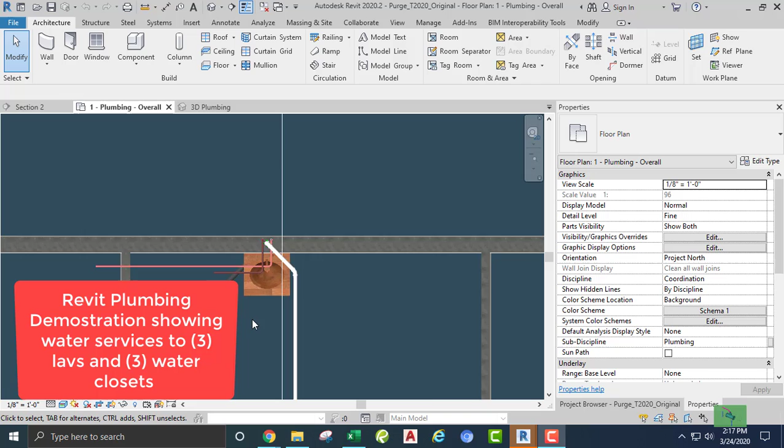Okay, let's look at some water piping, and we need to plumb this lavatory, two more lavatories. Looks like 3 water closets. Okay.

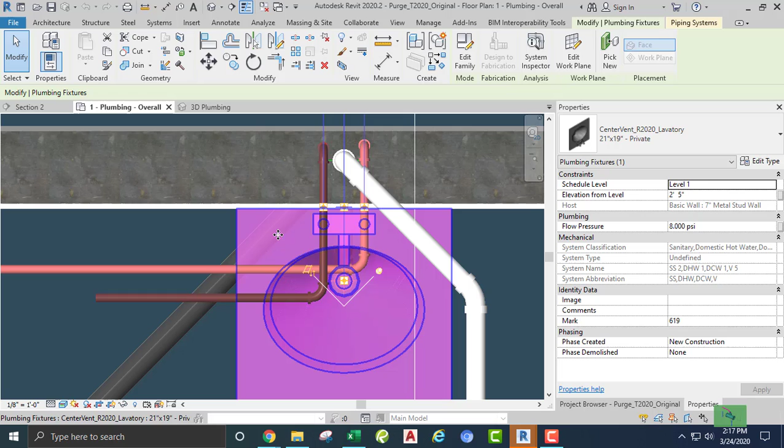Okay, let's start off with the hot water. Looks like these two are already there. Let's go back, I'm gonna start this over again. Just tab and erase this, pin objects.

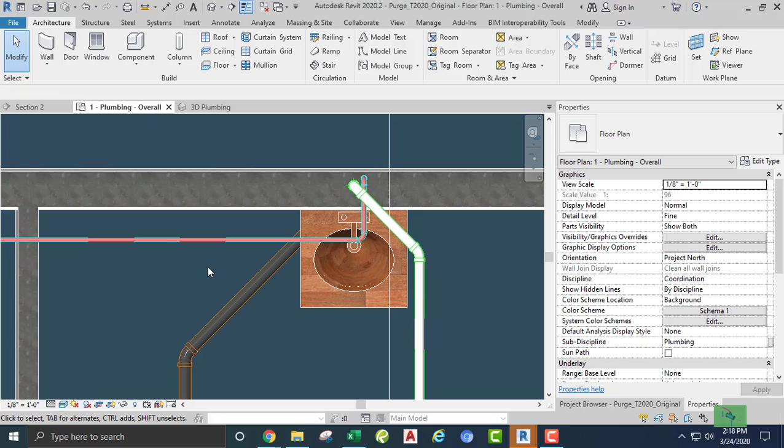Okay, I don't know why I would say that, but okay, so let's start off with this hot water. I'm gonna change this to a wireframe so we can see what we're doing.

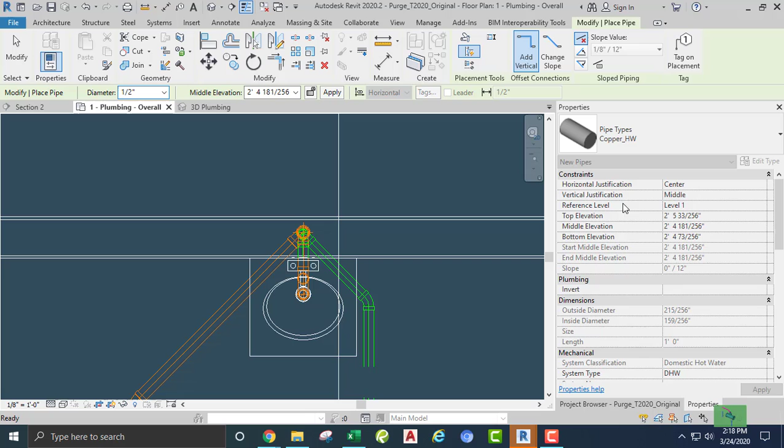So we got a 1/2 inch coming out of the rough-in. We need to change this pipe type to hot water, and we have hot water. We are gonna go up about right here, and now let's change this to a 3/4 inch and 10'8" from the floor, and we can come out.

Okay, let me check and see. Okay, so at 10'8" we can come out, and let's just take a look at that here. Okay, let's go back,

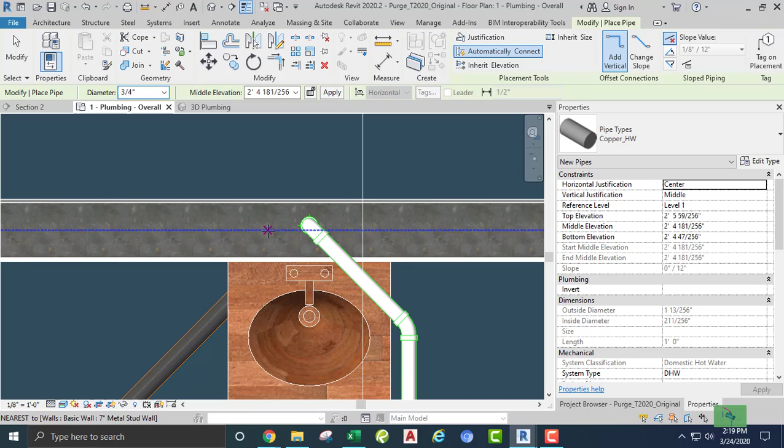Start over, and from here, that is a 1/2 inch. We're going to change that to 3/4 inch. And we're going to go up in the ceiling, 10'8", come out about right there, and go out there.

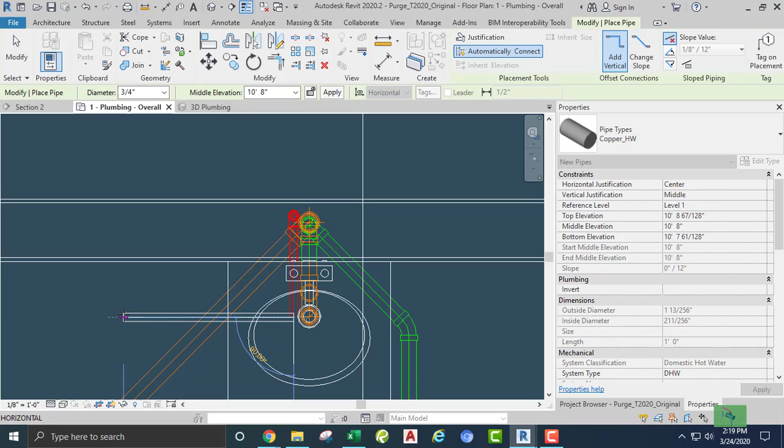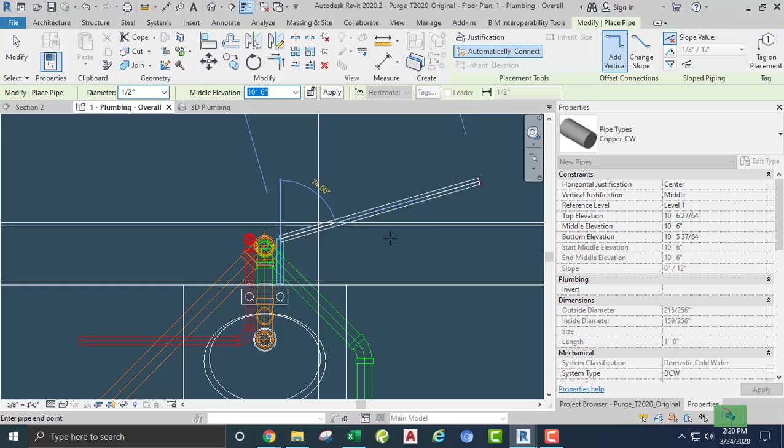Okay, and for the cold water, we're going to do the same thing, only we're going to go up in the ceiling 10'6", 1/2, and for the cold water, we're going to come up to about right there and change it to 10'6". Okay, and maybe about right there, and go out that way, just so we can see what's going on.

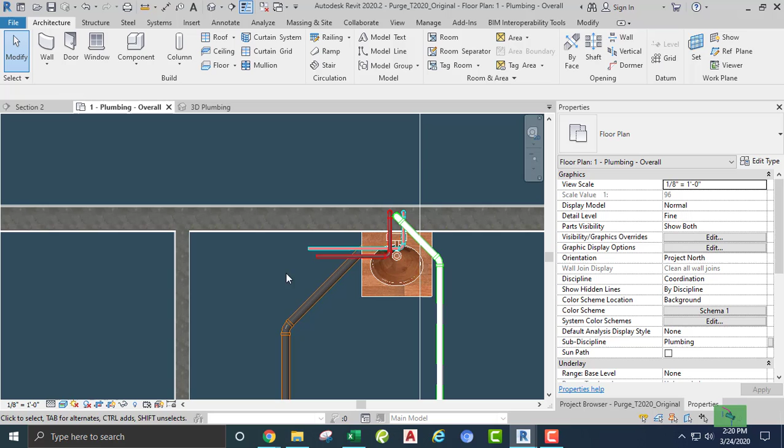Okay, so now, because the water heater is here, let's draw our pipe. That's a 3/4 inch. Yep. Okay, here and down here.

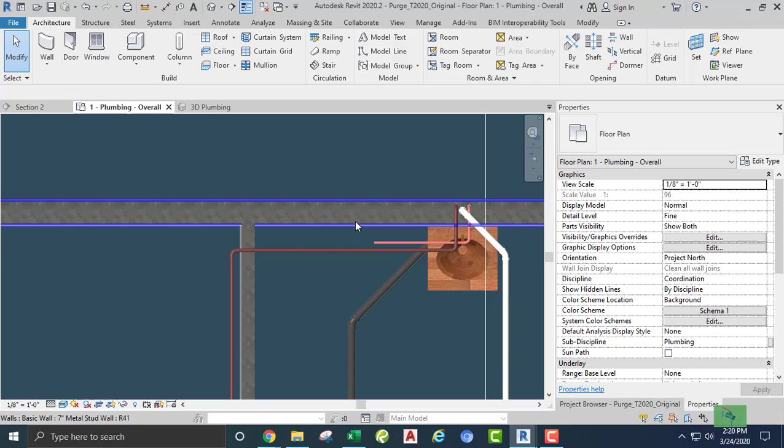Okay, and our cold water is going to go about right there. It's going to be cold water coming in the street from here, and I think it's a 2 inch based on what I see.

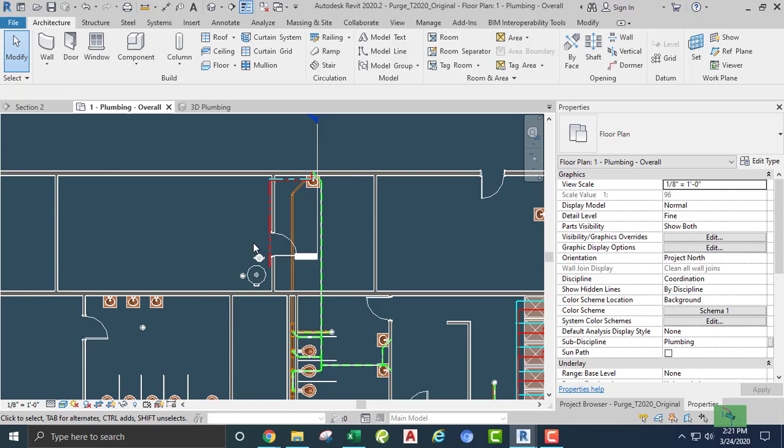So we're going to go to systems, and the pipe is going to be a 2 inch cold water. Okay, I'm in the ceiling at 10'6".

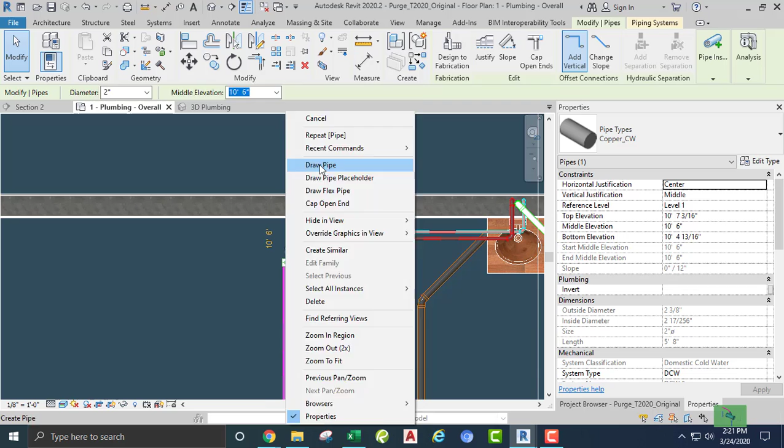Okay, so we can go from here, go out the building. We're in the ceiling space. Come out the building here and go down to the floor, or ground in this case. So let's say it's a negative 9.

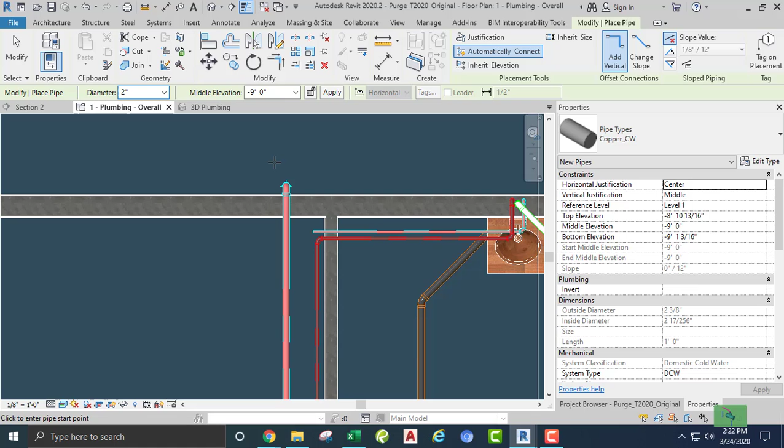Okay, and we can look at our 3D pipe. You know, let's look at a section through here, just so we can. Section 2. Okay, so we can trim that back.

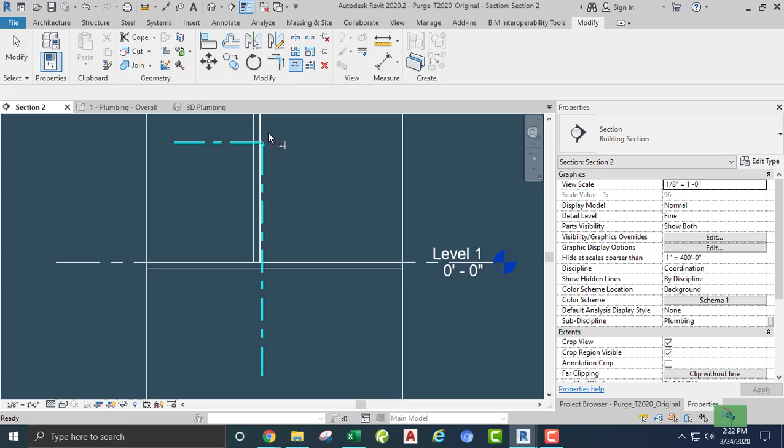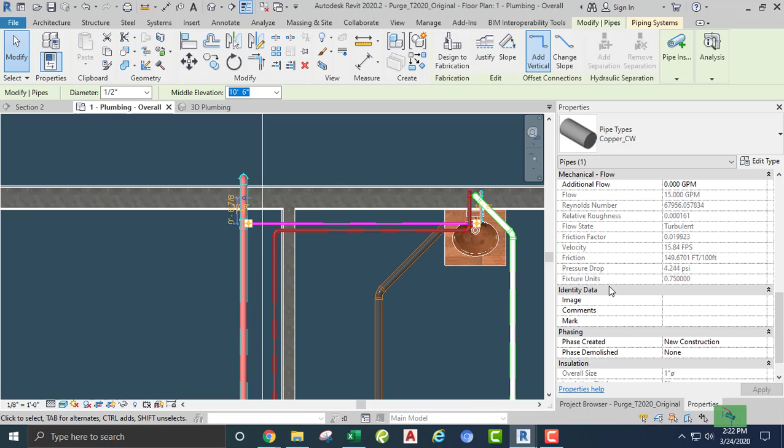Okay, that looks good. Let's go back to our floor plan, and we're going to connect. Let's connect the cold water into, okay, make sure we got our units, our fixture units are counting. Okay, fixture units, we're counting fixture units 0.75.

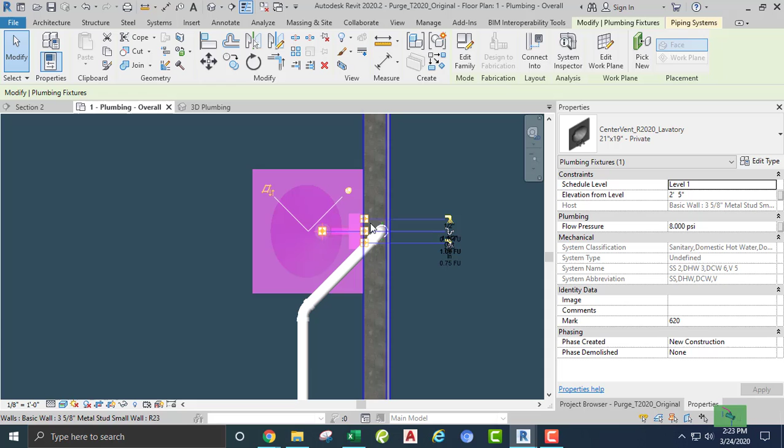Okay, so as we go down, let's go down and get the two lavatories. And for the hot water, we do the same thing. 1/2 inch, we go clockwise, make sure everything is good. That's hot water. Okay, we come out about right, let's say right there, and

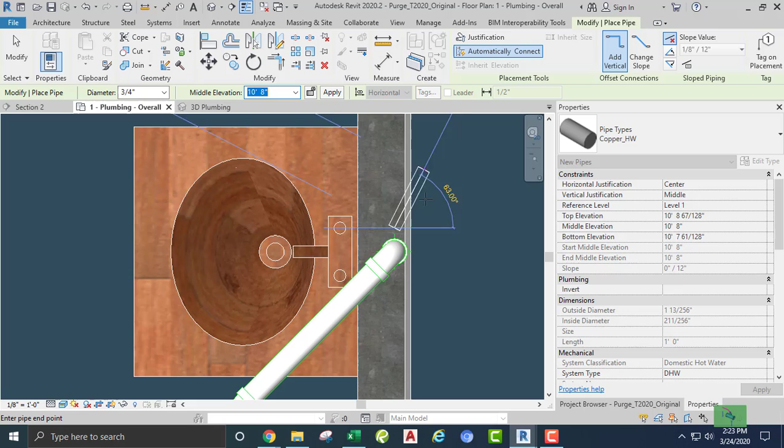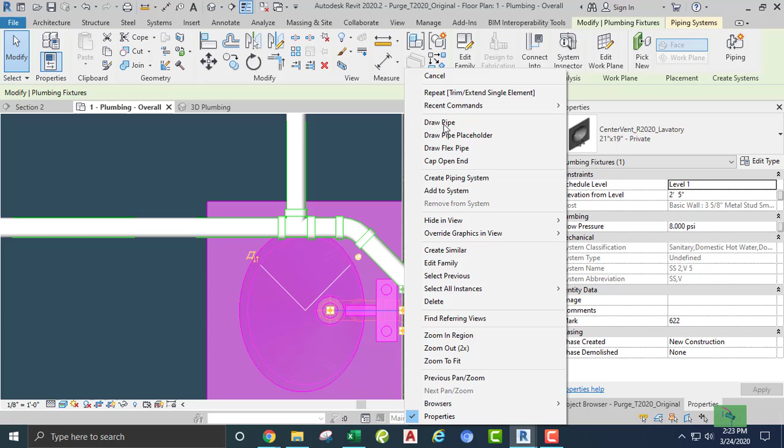Change. We come up at 10'8". Okay, say about right there. And what we're gonna need to do is connect into the hot water. Okay, let's get this other hot water from the other lavatory.

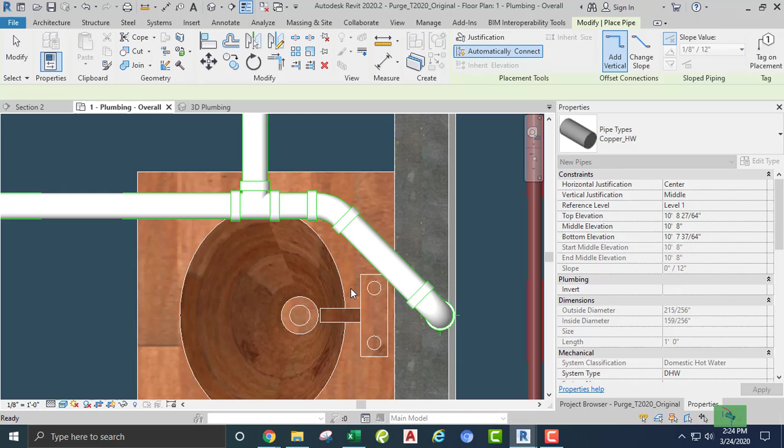Okay, 1/2, and hot water. Come out to about right there, and come up 10'8". So that's 1/2. I'm gonna need to change that so we can see what's going on. This is gonna be a wireframe.

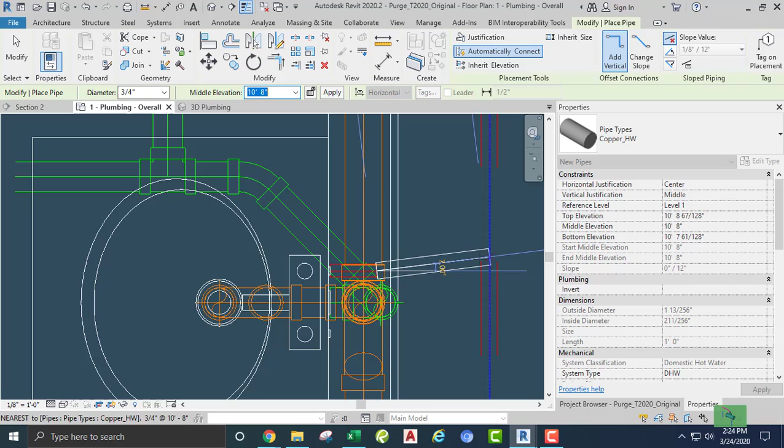So we are here, and we're gonna change the hot water from a 1/2 inch to a 3/4 inch, and we're gonna go up in the ceiling 10'8", so that we can connect into our 3/4 inch pipe. Okay, that's 2, and now we can connect here. We should get, okay, our plumbing fixtures.

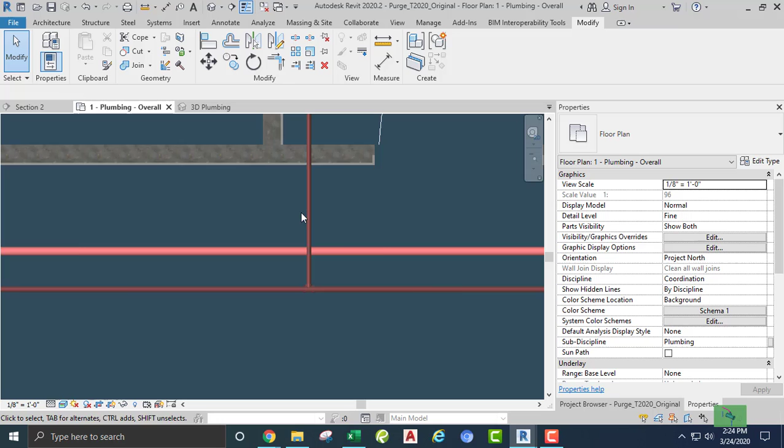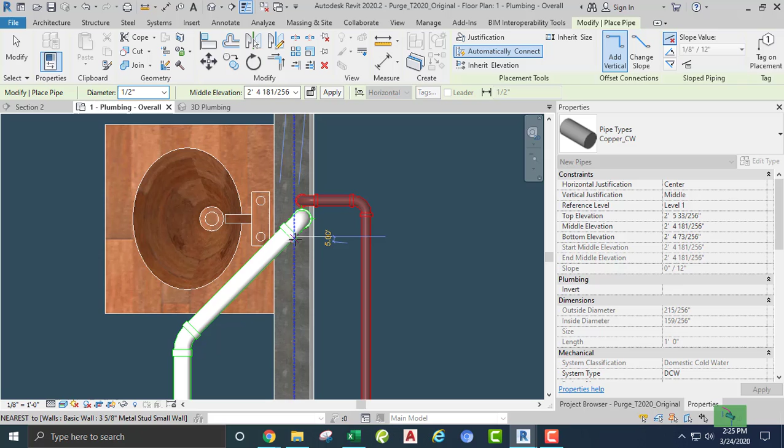Okay, now let's get the cold water, and we can do the same thing, only our system is going to be different. So get our hot water, go around, our cold water. Okay, get our 1/2 inch, be about right there. Then we change it to a 3/4 inch, and it's going to be 10'6", the ceiling space. So we come out about right there.

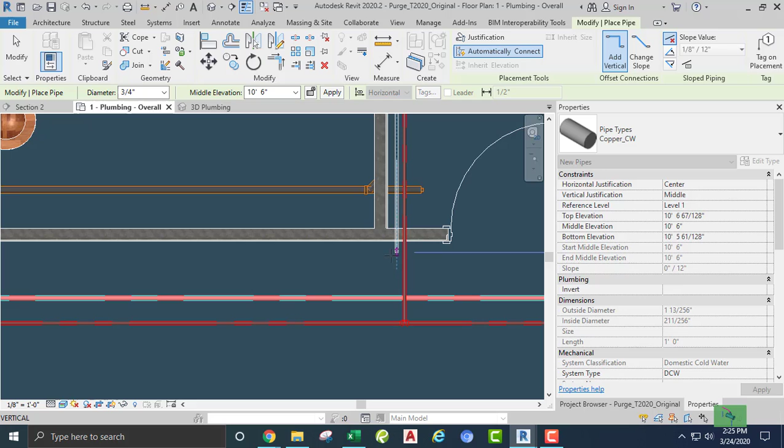Okay, now we come down and connect into our pipe. Okay, let's get the other cold water for the lavatory. And again, we have to make sure that our pipe type and our system type are matching.

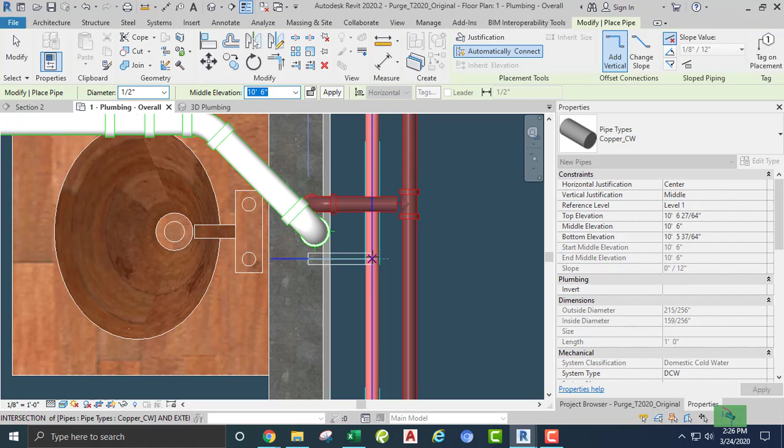And again, we go up in the ceiling space 10'6" to connect into the cold water. So we should get fixture units, right? Okay, good.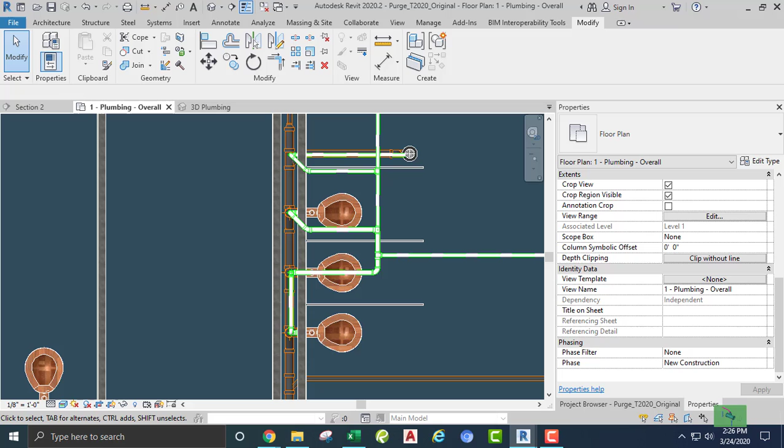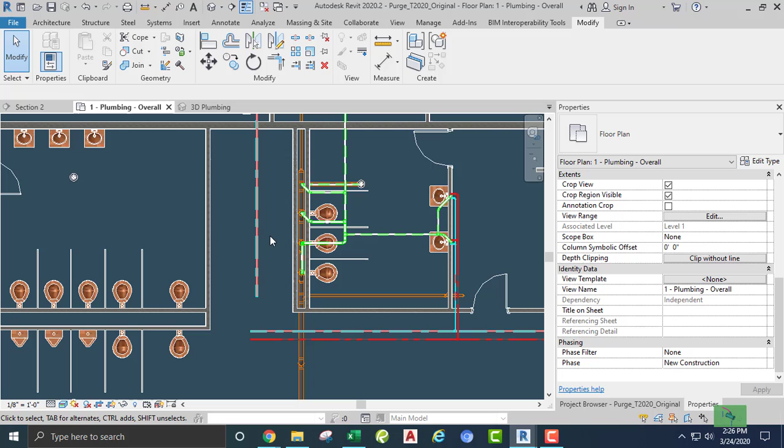Now let's go over to the 3 lavatories, and we are going to connect. Our cold water is going to come through, and we're going to connect here. And let's see here, based on this pipe, that's my cold water.

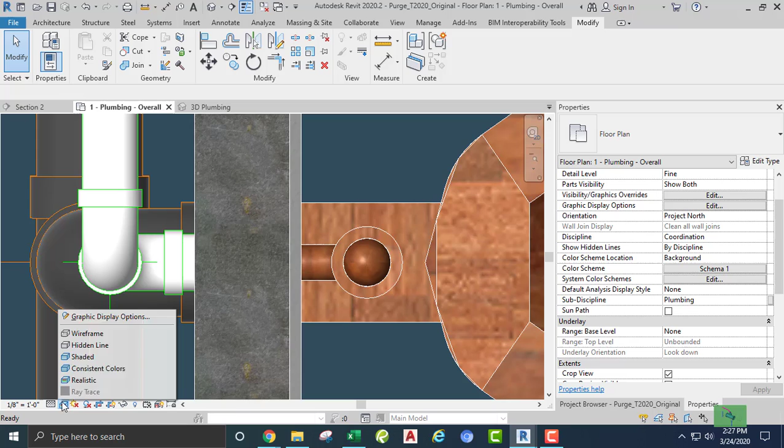Okay, let's look at the wireframe of this and get the cold waters. That's my cold waters here. Okay, so I'm gonna go out as far as I can, 1.5 inch, no slope, cold water.

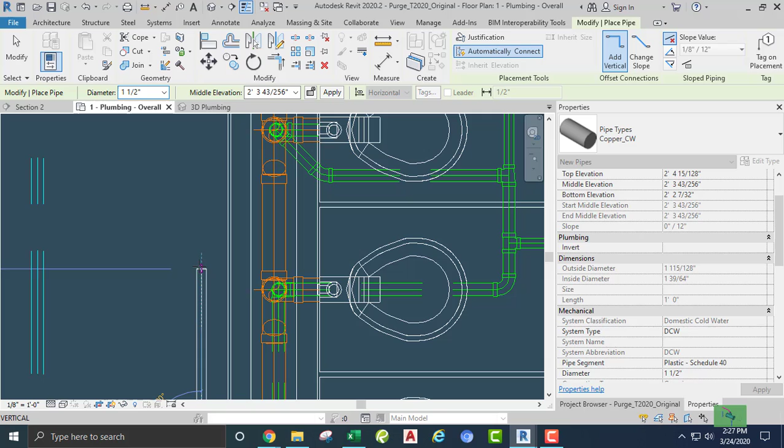We go out here, cold water, we come here, okay, and I'm gonna go here and make this guy. Yeah, that's 1.5 inch, right? Okay.

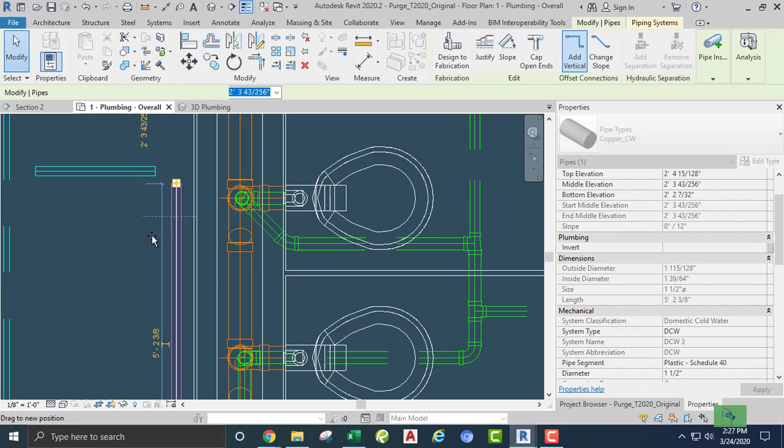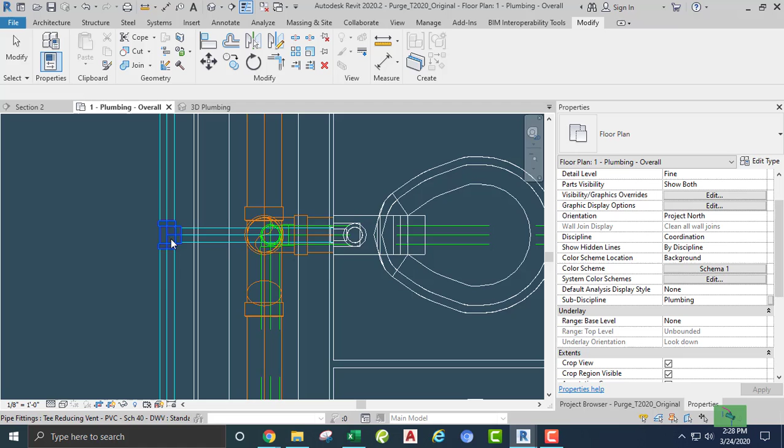So I'm gonna bring this back so we can get a good connection, because I want all three of these guys to connect. So instead of taking chances on it being too short, I am going to make sure that I have enough room in the beginning, so that there are no surprises. And I can move it back after I get my cold water connected.

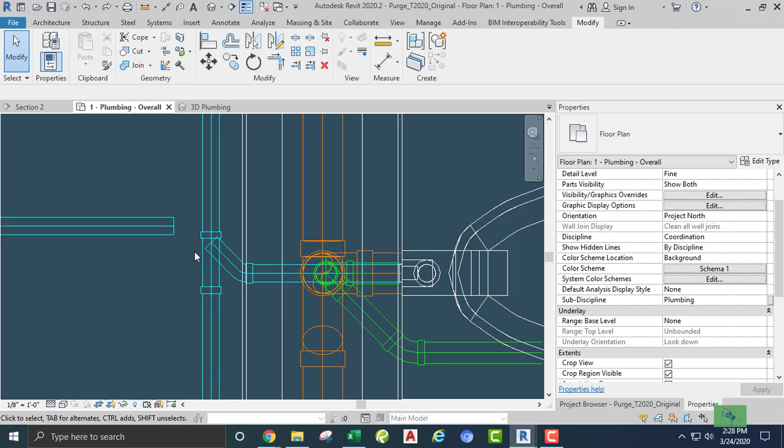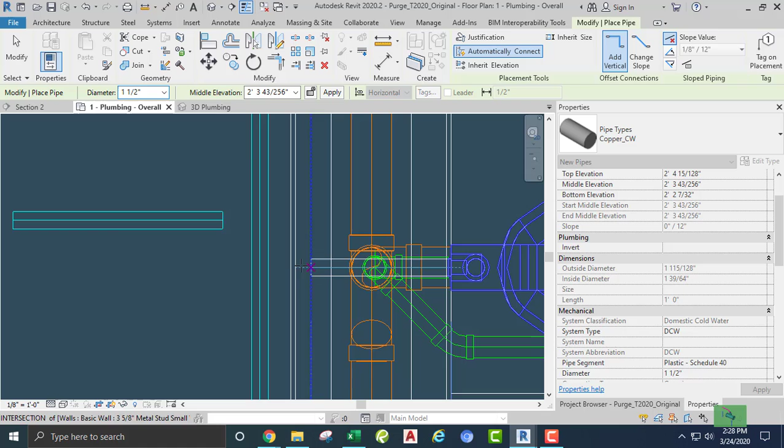Okay, so that's the last one, and we are there. Oh, wait. What happened? Undo. Oh, I know what happened. Because I need to always check that that was a sanitary combination instead of a cold water fitting, because it was on a different system. So now that it's on the right system, we can do that.

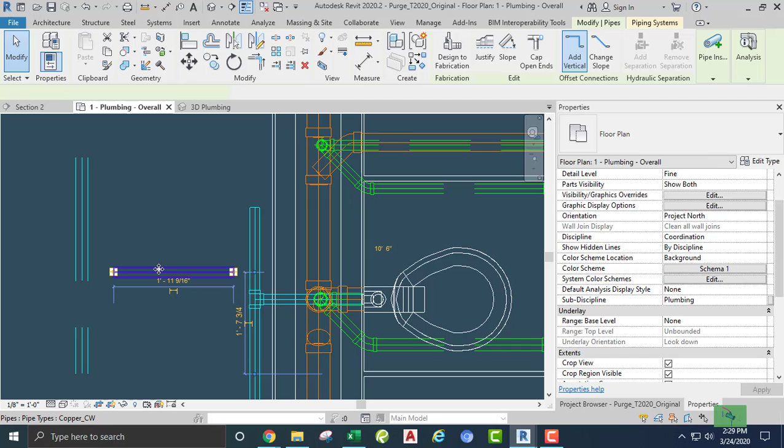And at the same time, I'm going to change this pipe elevation to 10'6". Okay. And we can go over just a little bit, because I want to drop down into that pipe with this fitting. Okay, so that looks good.

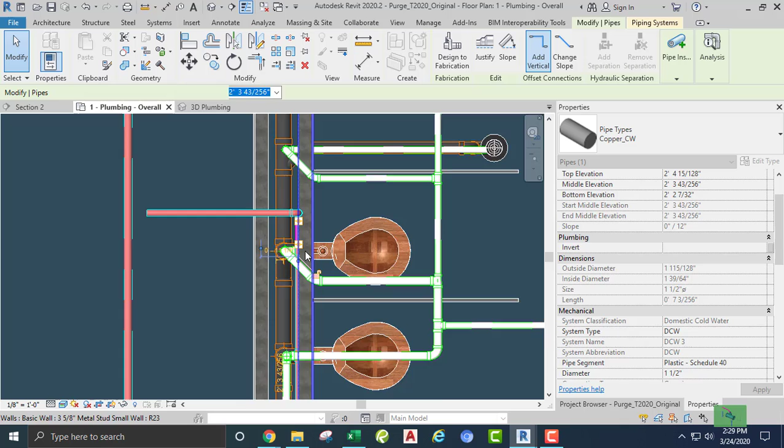So we can look at that guy. Okay, and then from here we just slide it down and as close as we can get it to the fixture, right? So we're watching that. Okay, so that looks good.

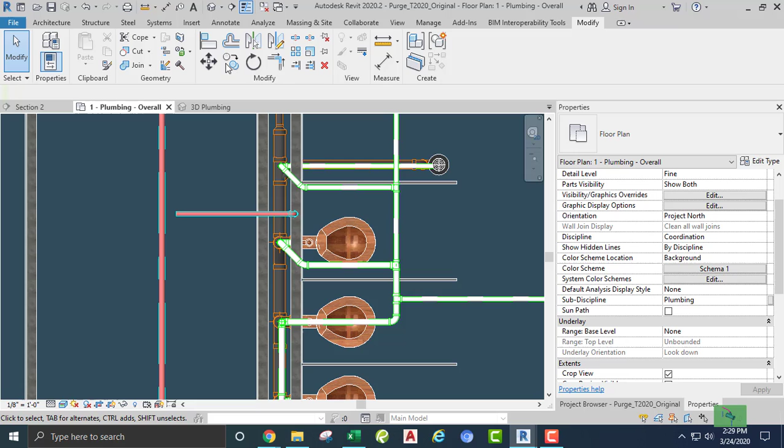So what we can do, take a look at that. Okay, so we got our cold water, and are we extending this guy? Yes. And that is a 1 1/2 inch. Yes. Let's trim it here.

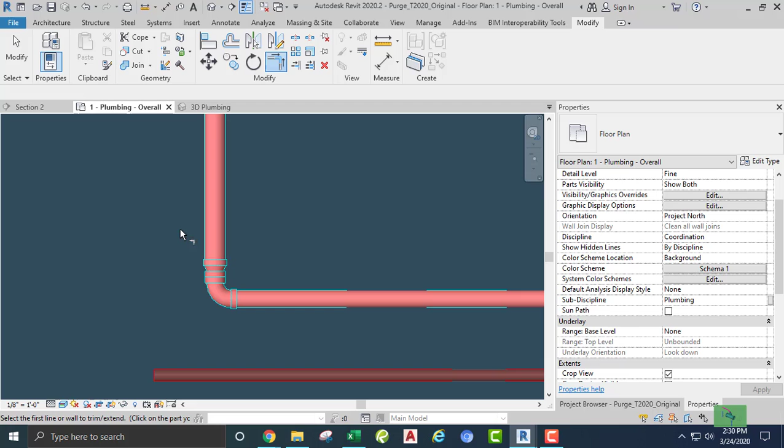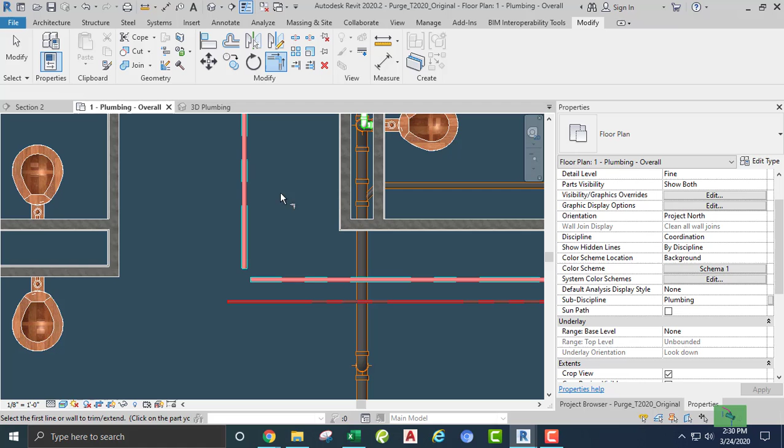Uh-oh, what happened here? Oh, it's a 2 inch. Let's change this. I'm gonna make this a 1.5 inch. Okay. And now let's trim it. Uh-oh. A little closer. Okay, that looks better. So we have our piping all connected.

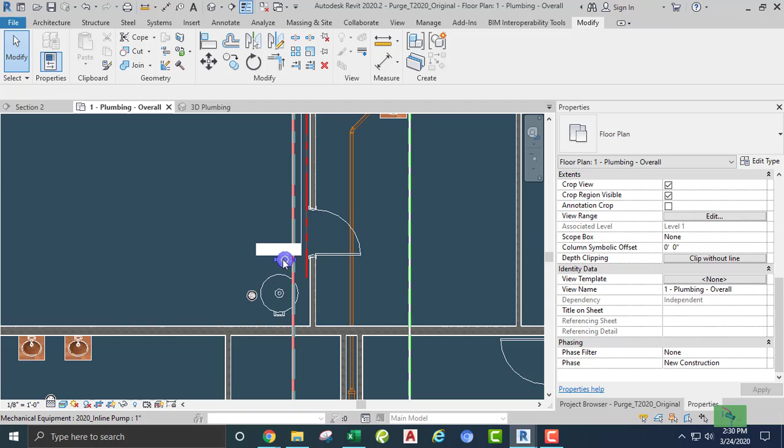We should get some fixture units going through that pipe. 76, yes, we like that. Okay. And next, what I'll do is connect this recirc pump up, because we're going to need a recirculation line.

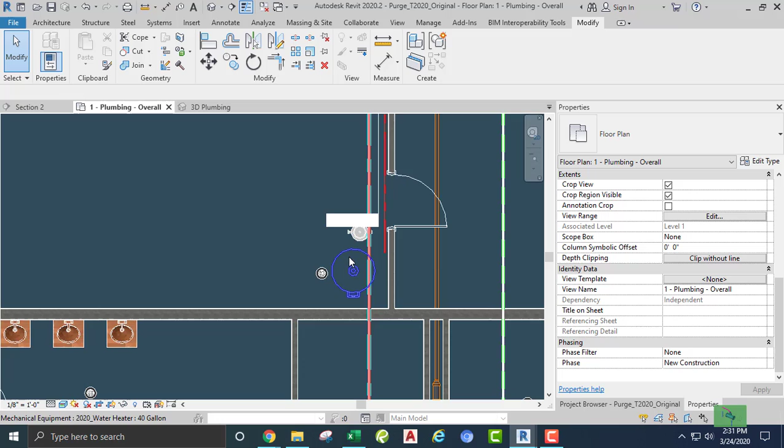And next time I'll connect the hot water up to the water heater along with the cold water. Might have to move that over a little bit. But anyway, that's the cold water and the hot water connection. And I'll talk to you guys later.